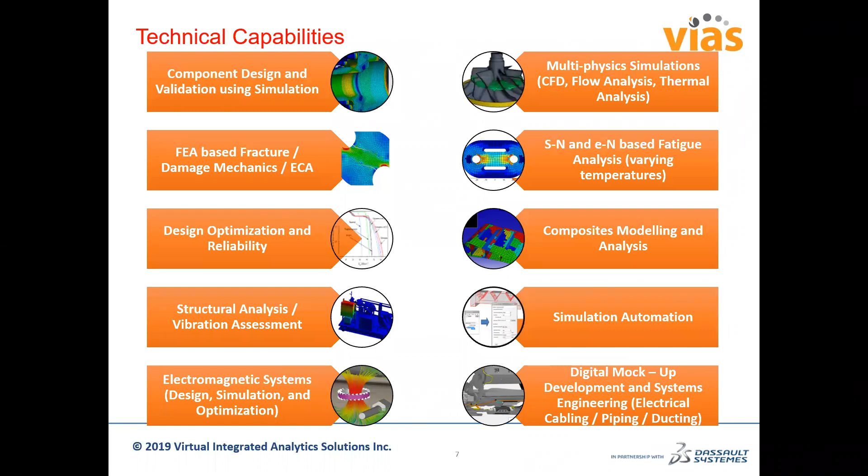That's pretty much our value proposition. I'll probably skip this section, but we are there to help you. We have a very good technical team with technical excellence and innovation, multiple domain experience so we can think outside the box, and a very dedicated team with a customer-first focus. So if you have any need, we should be able to help you out.

We also provide a lot of training. We have a training room here in Houston, and we also provide on-site training at many other locations, though we generally need a quorum of 2 to 3 students. We can come to your place if you want to train your group. So we provide both customized training out of the toolbox as well as industry-focused trainings.

With that, I will hand the slides back to Shri, and he will go over the Abaqus 2019 update. As I mentioned, if you have any questions about the update, or any general queries regarding your simulation or PLM needs, let us know. We'll have our experts give you an answer as much as possible. Thank you. Shri, do you want to take over?

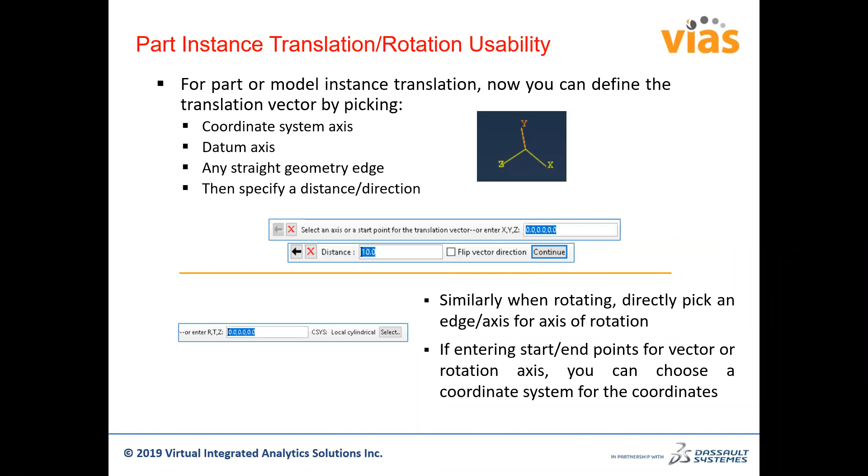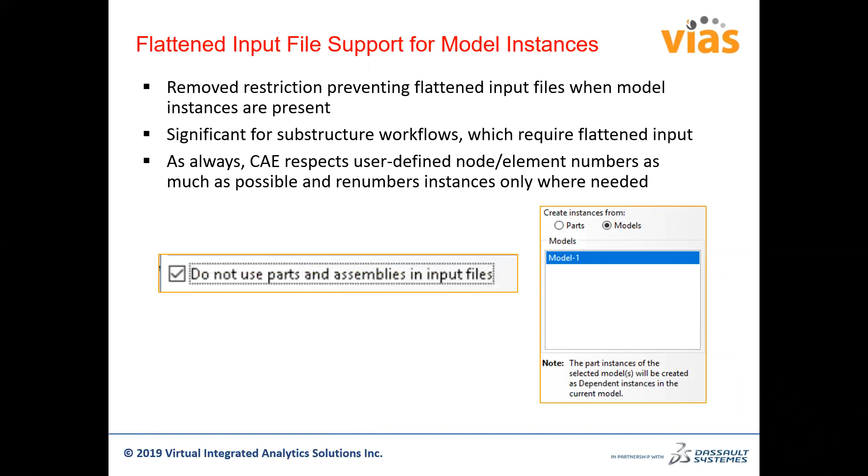We also started giving support to the CAXA and SAXA elements in GUI. That's basically axis-symmetric elements, but with asymmetric deformation. It supports both first and second order continuum and shell elements. You can specify 1 to 4 Fourier modes, and extra nodes are generated in the input file only. You don't see it in the CAE part.

Non-default node number offset can also be specified if you want that. Nodes due to Fourier modes do not exist in CAE, so you basically don't see them, and they cannot be picked up. But in the input file, they're created when it's written.

Abaqus doesn't support element-based surfaces on CAXA or SAXA elements. So even if you define it in CAE, they will just not be written in the input file. Pressure loads will automatically be applied using DLOAD instead of DSLOAD. Usually for a pressure load, DSLOAD is automatically created, but in this case they use DLOAD, which is an element-based load description.

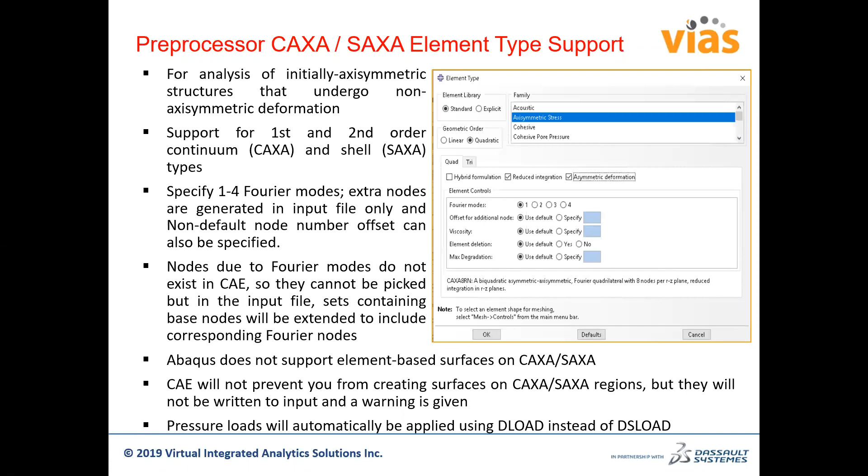This one is about fluid inflator interactions and properties. It's mostly used in airbag systems and so on. If you have a fluid inflator, you need to define it, which was not earlier available in the GUI part and earlier releases. Now it's been activated in Abaqus 2019 release.

The way to define that would be to create an interaction. So you go to the interaction module, just like any other thing like a contact or tie, and you create an interaction there, and you have an option to choose fluid inflator property now. Once you associate the fluid inflator with a fluid cavity interaction, it'll actually open up a set of dialog boxes in sequential way as you keep progressing.

So you have to create the interaction property fluid inflator, and then it'll ask you to fill in those dialog boxes that you see on the right bottom, edit interaction property, and once you are done with that, you basically define the fluid inflator in GUI.

So fluid inflator property defines basically mass flow rate, temperature, inflation time data, and mixture of gases entering the fluid cavity. Within the cavity, you can have a mixture of different entities. Those can be defined with different interaction properties, as seen in the bottom right dialog box.

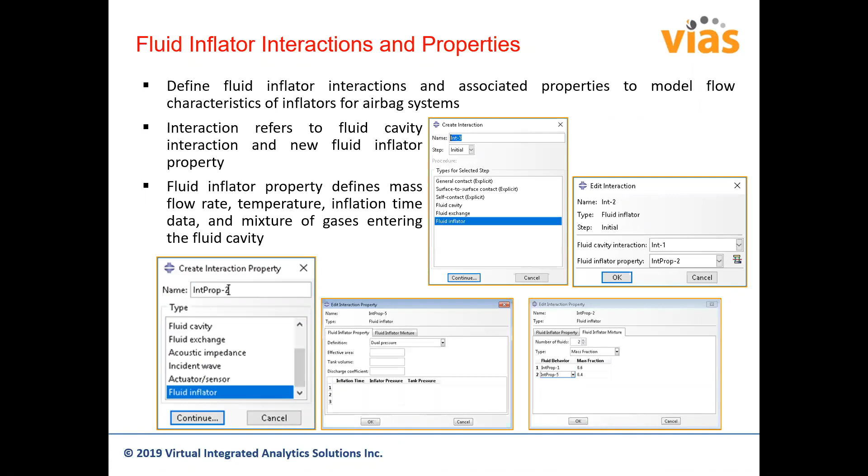There's some optimization enhancements. This is related to Abaqus and Tosca coupling in a way. Support for overhang restriction for topology optimization. So just in case if you have some kind of structure, if you can see my mouse, in the middle here there are red color support structures. These are required because of the additive manufacturing constraints, specifically because of the model geometry, so we have to have the supports also included in the modeling.

But with the new enhancement where you can define an overhanging constraint, the necessity to define support structures is removed. For example, in the dialog box, by geometric restriction, you can define an overhang angle. That's basically defined by the red line here with an angle alpha. Based on that, you can actually remove the support structures and have a model free of support structures. That will save some time.

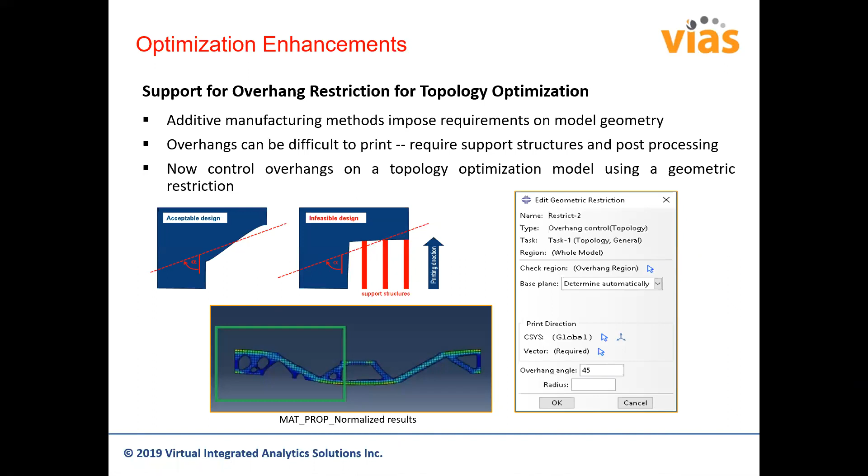There's also sensitivity-based shape optimization. Shape optimization didn't have the sensitivity or studies option with Abaqus and Tosca, but now that has been included. In the dialog box here, you can see that earlier it used to be only condition-based optimization, but now we have an extra option of using a general optimization sensitivity-based algorithm too for shape.

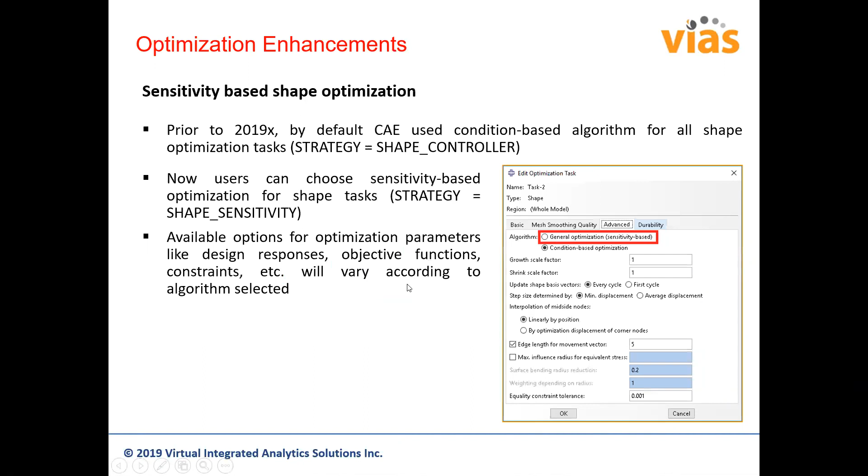It was available for other optimization aspects like topology, beam sizing, and all that, but I think for shape this is the first time they've introduced it, in 2019. So the available options for optimization parameters include the regular ones - design responses, objective functions, constraints - and they'll vary according to the algorithm you select, either condition-based or general optimization.

You also have this option, the way to define that would be to use Abaqus sensitivities when possible. This particular one will be available in the dialog box. What it does internally is activate the sense calc mode, which is like a parameter for Tosca, into automatic. Otherwise, it will go back to the original one, which is sensitivities with sequential run mode in Tosca. This is available for all task types: topology, shape, bead, and sizing.

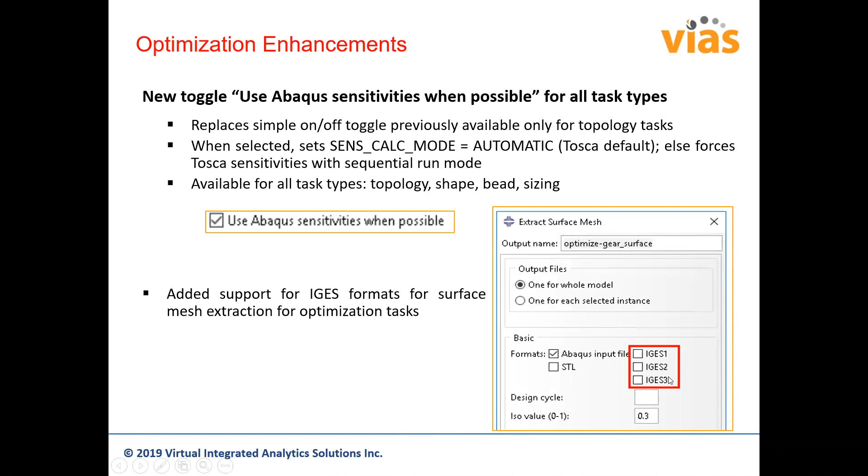The new enhancement allows you to use IGES surface formats for surfaces. In the optimization task, the earlier options were only Abaqus input file or STL. Now the new format added is IGES format.

The element output with position average at nodes, when you use this keyword in the input file, writes output with average at nodes. But that was not available to be visualized in the ODB when opened in CAE—it was more like an output written to the DAT file. Now they've included that as a field output, so you can see it in CAE itself. All operations related to a nodal field are supported, like contour, symbol plots, probe, etc.

There are a bunch of operations that can be done for that particular output. I'll skip the details since we have other topics to cover, but basically most of the regular operations you do with contour plot or field output, you can do the same with this one too.

Invariant computations for complex frequency results: if you have complex frequency in your model or solution, three complex envelope options have been added—min, max, and max absolute. They work by combining the real and imaginary portions of the result while varying the angle from 0 to 360 degrees. These envelope methods are a great alternative for visualizing the complex form of stress invariants, and that's very useful.

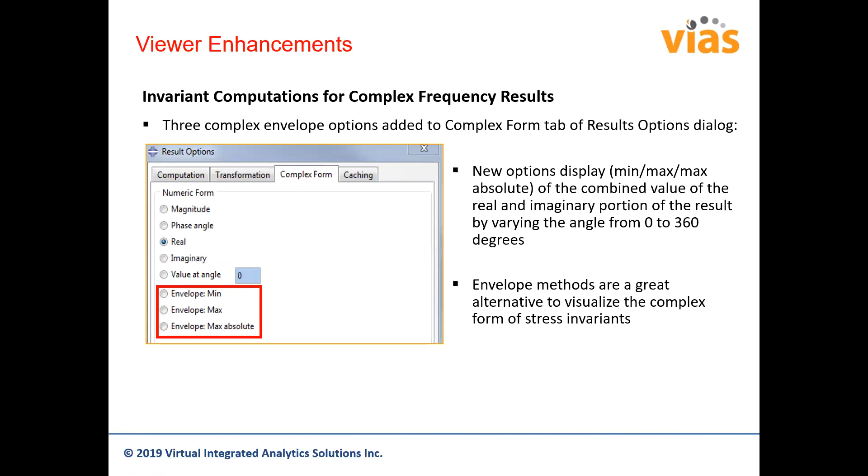There's a new variable called BRADIUS available for output. When you request it, I don't think it's available as a model output request through the GUI—you have to go through the input file or keyword. Once you request that output called BRADIUS, you can check it as a contour plot, showing the radius of the beam across the model. This helps you see the spatial distribution of beam radius overall, which is very useful for lattice beam optimization techniques where you want to see what kind of beam radii are given throughout the model.

The way to activate beam radius visualization in the CAE visualization module is through this particular dialog box—render beam profiles—which you access through one of the menu options.

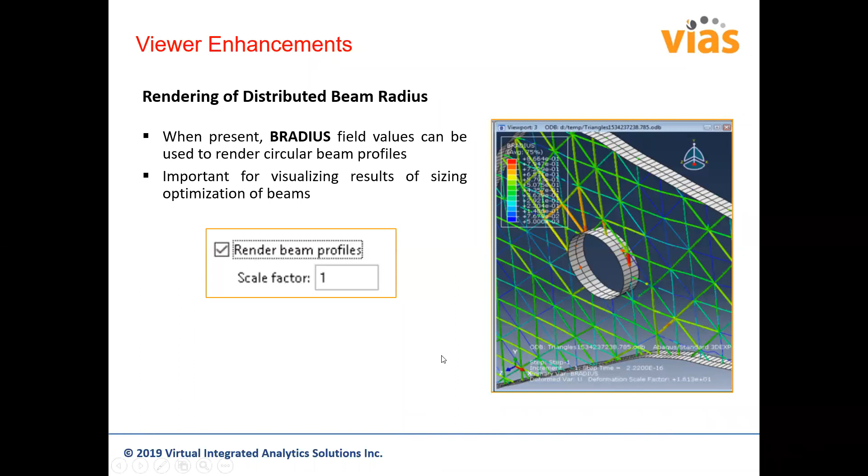There are other enhancements I'll briefly go over without going into details. We can now export CAE assemblies to spatial ASAT format, which is useful for 3D experience. We can also capture all parts and assembly positioning, and it supports model instances besides part instances. There's also support for selecting multiple frames at once in field output reports.

This is a new one—you can have multiple frames written together into field output reports as a text format. You can also select active steps of frames to include in the report, so if you want only specific frames active in the visualization module at that point in time, you can write just those active steps into the report. It also works with annotated or CSV formats, which can be used in Excel sheets for further processing.

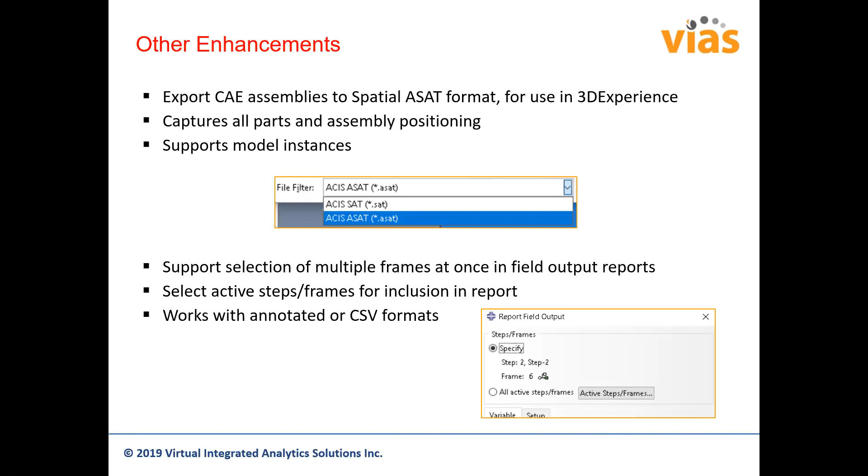There's also a reverse contour plot legend that has minimum on top and maximum on the bottom, which is useful for some processes you might want.

There are also scripting API enhancements: you can retrieve a cross-sectional area defined by a free body cut, get exterior element faces of a solid element sequence—so if you have a sequence of elements, you can extract only the exterior faces facing the outside region—and also get exterior element edges of shell or 2D element sequences.

With that, the GUI updates are over, and let's move on to the nonlinear mechanics updates—this is more related to the solver part in a way.

Additive manufacturing updates: this is a new enhancement for additive manufacturing—outputting the displacement or rotation at a node from the time it becomes active. We also provide better agreement with experimental results in cases when inactive elements follow the movement of active elements because of this enhancement. Both history and field output are supported in this case.

For example, here in the picture, they show displacements in a plate, comparing follow deformation equal to no versus follow deformation equal to yes. You can see a significant change in results.

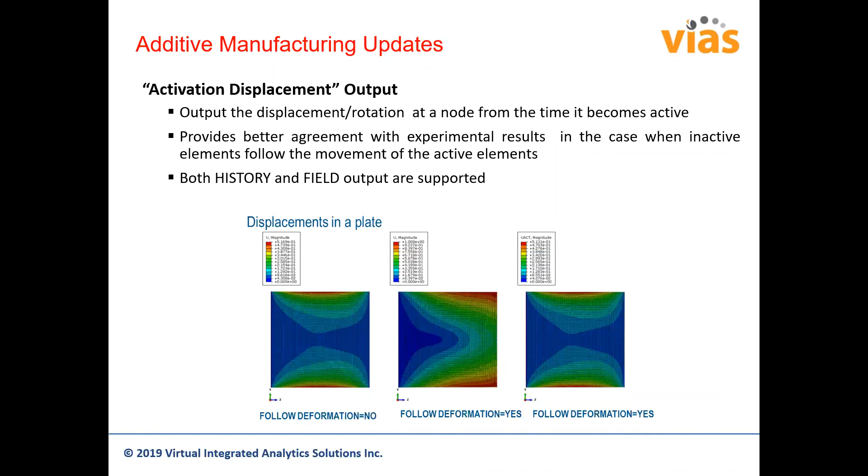The next one is a convergence improvement of heat transfer analysis. Some of the heat transfer analyses run pretty slow. It's better to have it for performance's sake and also in the convergence aspect too. So those have been enhanced in this particular release, both for transient and steady state when linear elements and temperature-dependent conductivity are used.

Improvement was achieved by consistent evaluation of conductivity at the integration point. In some cases, heat transfer analyses that previously failed to converge now complete successfully. So that's a big improvement.

There's also an improvement implemented specifically for the brick elements, the hexahedral elements. The previous behavior can be restored if you want by using the keyword *SECTION CONTROLS, HT INTEGRATION=OLD, just in case you want old results to be used for your current analysis.

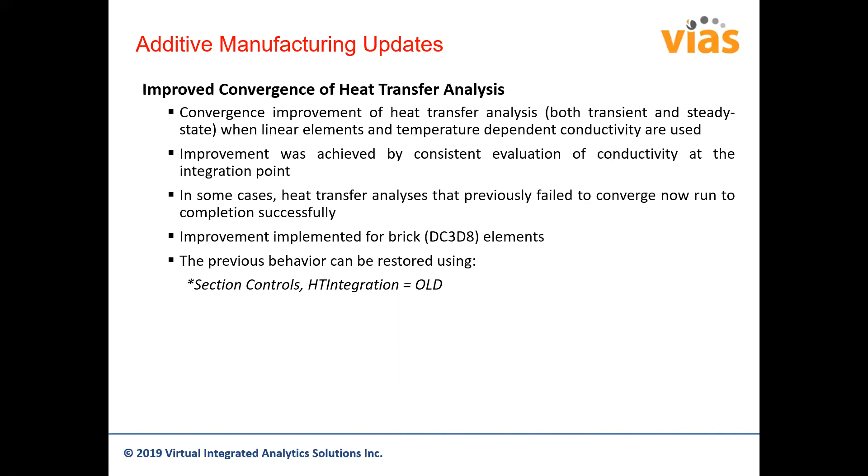The size of the event series data is no longer limited to 2 GB. We can now go beyond that. You can now define event series with over 420 million events. The enhancement is available only for event series defined in the sim file, which is basically a file parameter on *EVENT SERIES, so you have to use that to activate the sim file. It's available for pure heat transfer analysis in Abaqus/Standard, both field and history output.

Then there are a bunch of field output variables introduced in the Abaqus 2019 update. There's EHUMDFLUX, which is element internal heat energy due to non-uniform moving flux. There's also element internal heat energy density due to non-uniform moving flux, and then whole model heat transfer energy due to non-uniform moving flux. So with respect to heat transfer, there's the element internal heat energy and density, and whole model heat transfer energy.

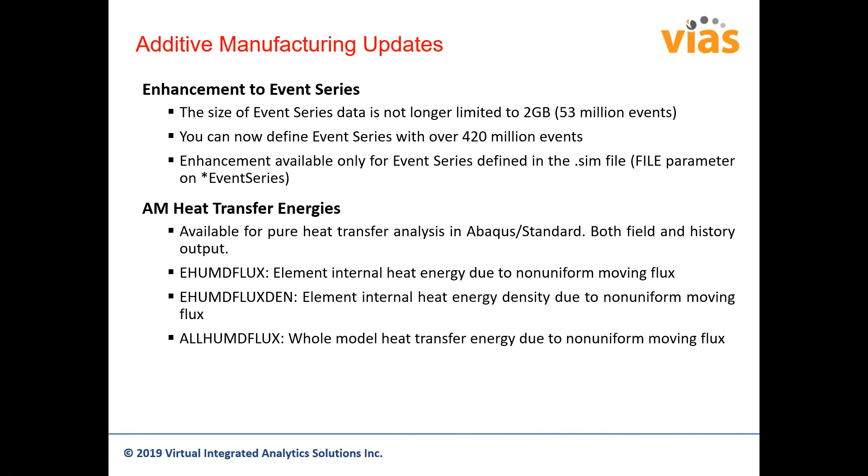Moving on to the next one, which is fracture mechanics. There's linear elastic fatigue crack growth under mixed mode conditions. There's one update on that which improves the performance of both the general and simplified approaches. It allows for change of contact conditions within a loading cycle, it accounts for large geometric nonlinearity, and it accounts for mixed mode fatigue loading. So these are the enhancements with regard to linear elastic fatigue crack growth under mixed mode conditions.

The next one is for XFEM for 3D non-planar cracks, smoothing the predicted crack direction along the crack front. It includes the contributions from the normal of not only the elements ahead of the crack, but also the elements directly behind the crack front. That was not available earlier, and it has been introduced in the new release.

Improved performance and convergence with multiple node release. By default, only one row of nodes is allowed to fracture ahead of the crack front within one increment. But now they have relaxed that, and multiple nodes can undergo fracture without really affecting the performance.

Symmetric cohesive elements, there's an update on that too. The symmetric plane can be chosen as any plane perpendicular to one of the global coordinate axes. Symmetric deformation of cohesive elements will be automatically enforced, and the user doesn't need to apply any symmetric constraints or boundary conditions. So there's less work required from the user.

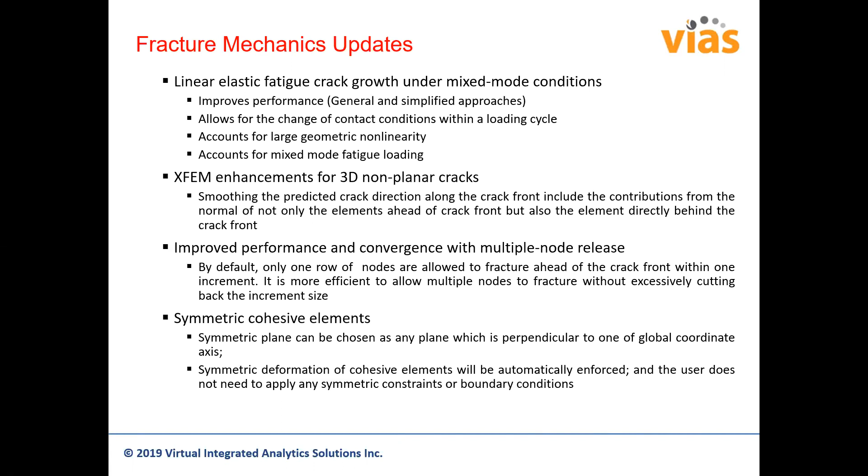With regard to elements, two sets of elements have been introduced in Abaqus 2019. One set is poroelastic acoustic Biot elements. These are coupled for structural and acoustic analysis. The nomenclature is C3D8A, where structural is C3D8 and A stands for acoustic. You have multiple shapes like brick, wedge, and tetrahedron. The same shape functions are used for both the displacements and pressures, which are the variables that will be solved for.

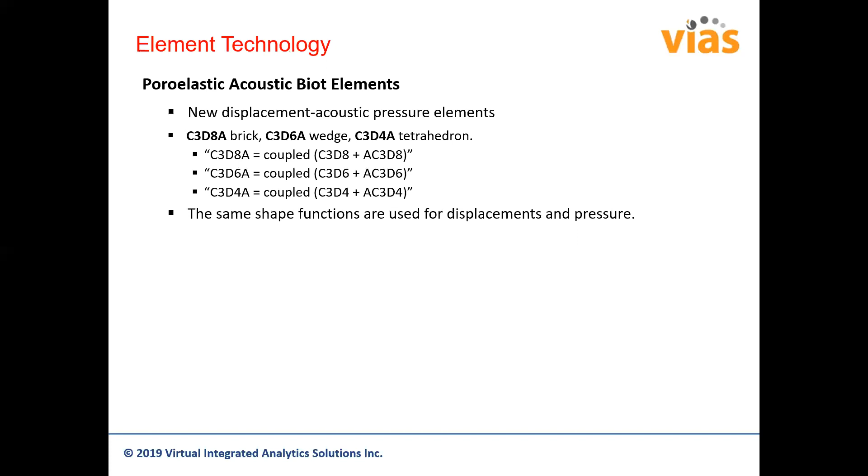The other set is the new shear panel element, SHEAR4, for Abaqus/Standard. These are mostly used in aircraft wing and fuselage structures, and will be very useful there. They are intended to model the response of a buckled plate. Shear panel elements carry only shear forces applied to their edges. They are 4-noded elements with 3 displacement degrees of freedom at each node, and only elastic material can be applied for these elements.

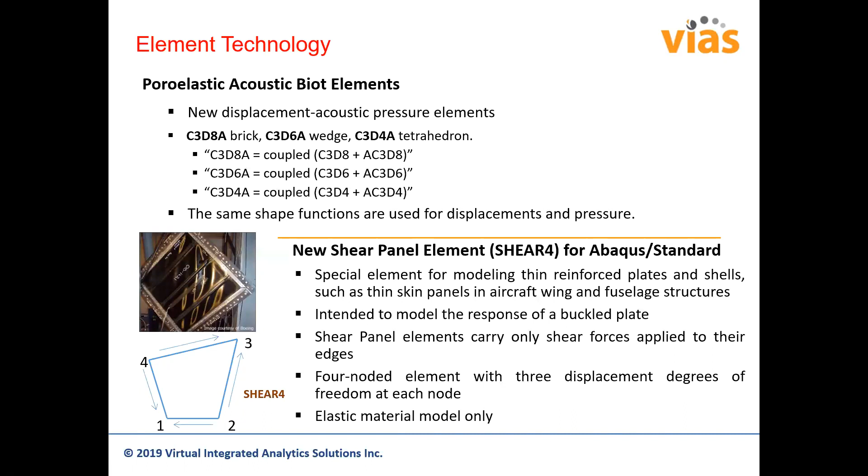So as I mentioned earlier, the BRADIUS was the output variable. You can actually now define that for the beam elements. It's supported in Abaqus CAE for the contour plot output display, but it cannot be used for definition or request of the output itself. For that, you need to use the input file: in star element output, you add BRADIUS in the data lines itself. And to display the output, you have to again render the beam profiles in the visualization module of Abaqus CAE once you open the ODB with the beam elements in the model.

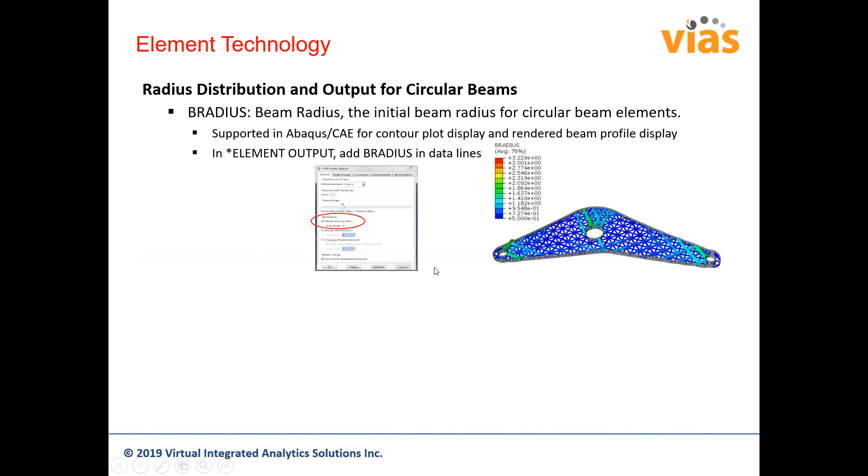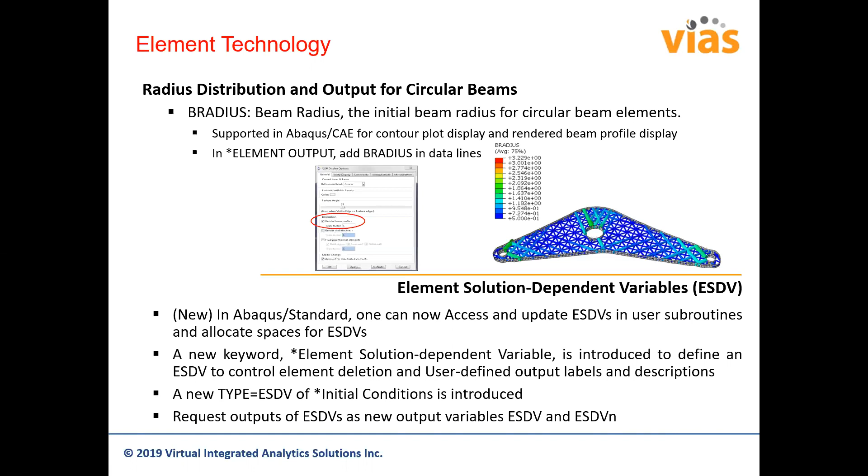There's also element solution dependent variables output that's given as an output variable, ESDV. In Abaqus Standard, one can now access and update ESDVs in user subroutines and allocate spaces for that. These are specifically used in additive manufacturing when you want to group a bunch of elements together based on specific values of these variables. It's used to define ESDV to control element deletion and also user-defined output labels and descriptions. A new type equal to ESDV of star initial conditions is introduced. It requests outputs of ESDVs as new output variables, ESDV and ESDVn, where n stands for the number of variables.

Low density foam, this is a specific material enhancement now. The model is already available in Abaqus Explicit, but I think it's been introduced in Standard now. The model is intended for highly compressible elastomeric foams. Import is fully supported, but there are some limitations. It's only applicable for quasi-static response. For quasi-static response, the strain rate dependence is ignored, and tension cutoff and failure are not supported. They're ignored if included in the definition.

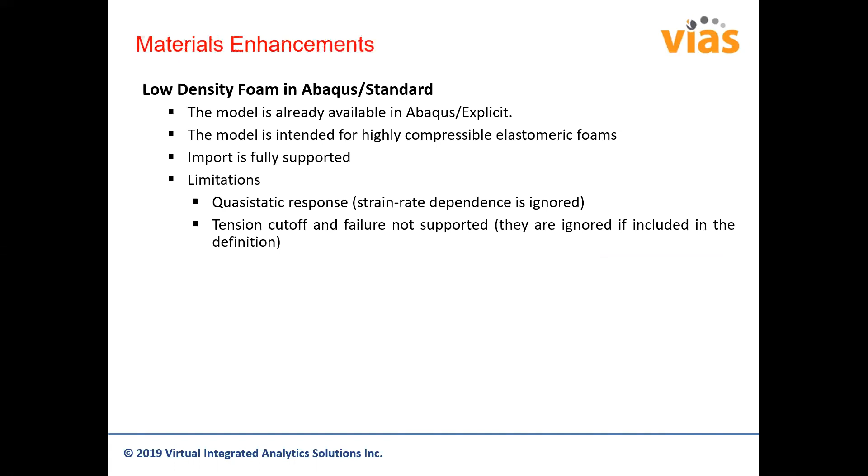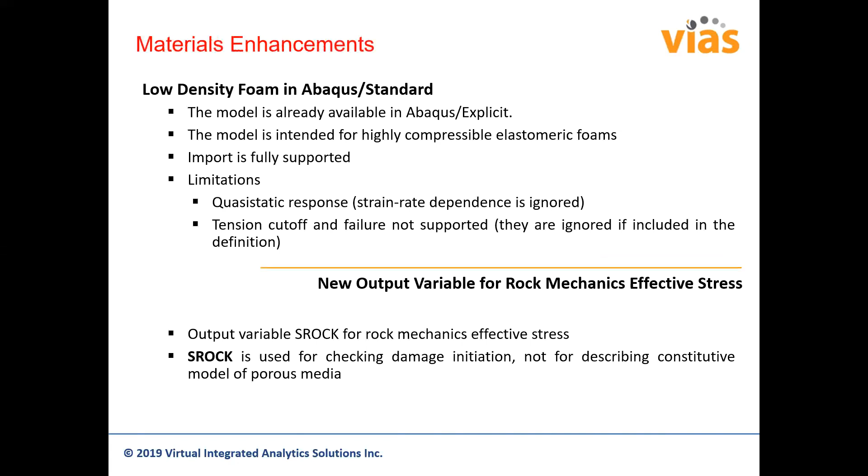There's also a new output variable, SROCK, for rock mechanics effective stress. SROCK is used for checking damage initiation, not for describing the constitutive model of porous media. So it's only for damage initiation, and it's an output variable.

Enhancements to superelastic materials: a modified formulation for superelastic material is introduced. This is basically like inbuilt materials in Abaqus, like nitinol, for example, which is used in stent analysis. They have actually improved the import functionality between Abaqus solvers, and also improved the convergence and performance of the material model itself.

A new keyword has been added in Abaqus. This is more of a section definition, star transverse shear. It allows users to define material transverse shear moduli for computing transverse shear stiffness of shells and beams. It eliminates the need, which was the earlier one, to define transverse shear stiffness as part of the section definition. But now we can have that as a material definition. It is convenient for users to compute transverse shear stiffness when a shell section has spatially varying thickness or a shell section is made of composites. Now it's defined as a sub-option of star material transverse shear, with type equal to isotropic, orthotropic, anisotropic, and dependencies are based on the field.

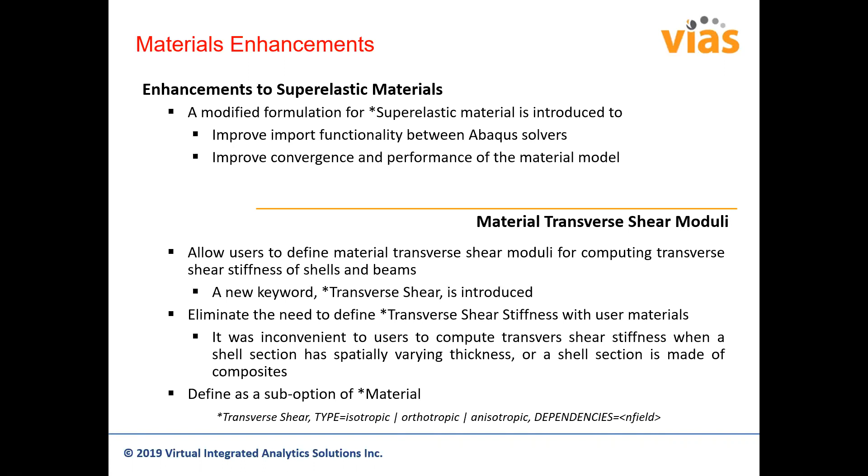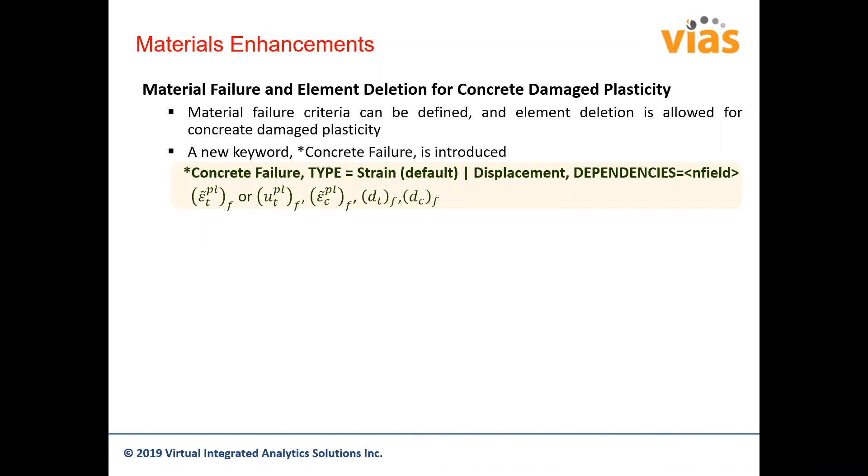There's also material failure and element deletion available for concrete damaged plasticity. Material failure criteria can be defined, and element deletion is allowed for concrete damaged plasticity. Pardon me for the typo there, it's concrete. A new keyword, star concrete failure, is introduced. Concrete failure type equal to strain, default, or displacement. Again, dependencies on any field variable. You can define the strain or the displacement, tensile or compressive, and also the damage variable. Again, based on field dependence if you have that.

Output enhancements for traction separation response. In Abaqus Explicit, two new output variables are introduced. Basically, NEEQ, which is equivalent nominal strain, which is again given as a formula there. It's a function of normal strain and shear and tangential. Effective separation, basically the separation between the two surfaces which are joined by these cohesive elements, is defined by that formula, which is the effective strain times T naught, the distance between the two surfaces, which is given by the cohesive element thickness.

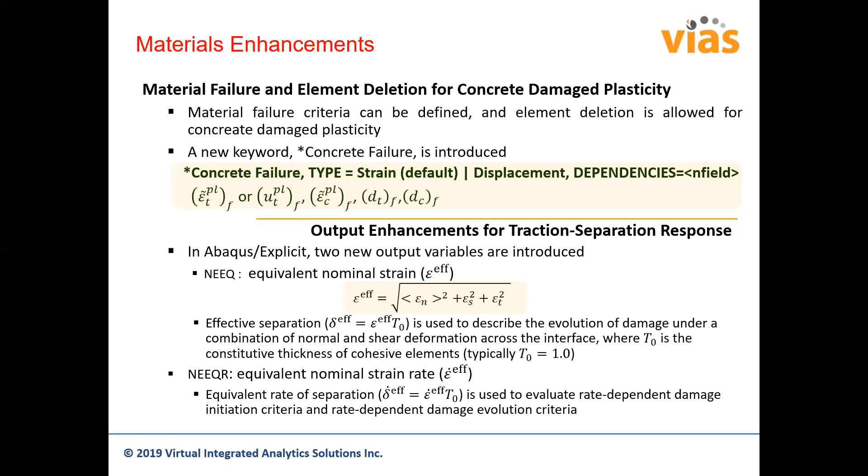The NEEQR is equivalent nominal strain rate. It's epsilon dot E effective. Basically, this is a strain rate. It's just the same way as epsilon effective, but with dependence on time.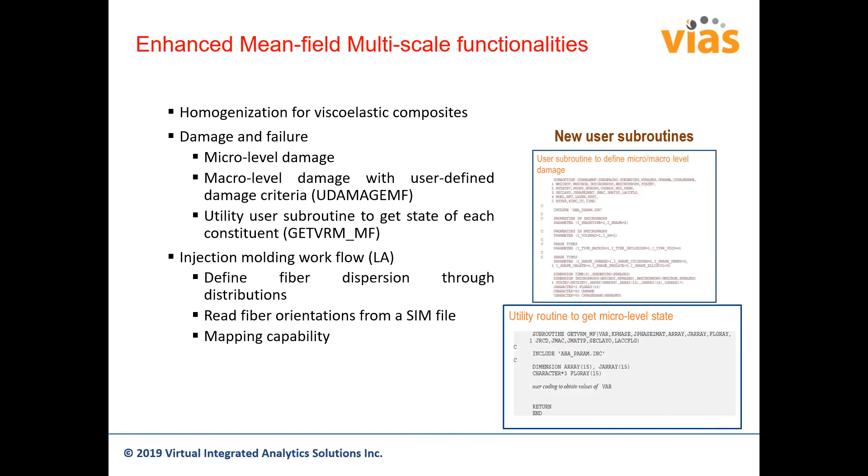Moving on to the next topic, it's about contact. By and large, contact has been seeing improvements over a period of the last few years, especially by introduction of general contact in Abaqus Standard. So it has been seeing various formulations and even the different dimensions like axisymmetric 2D models, 3D models, and so on. So this is one more step towards that.

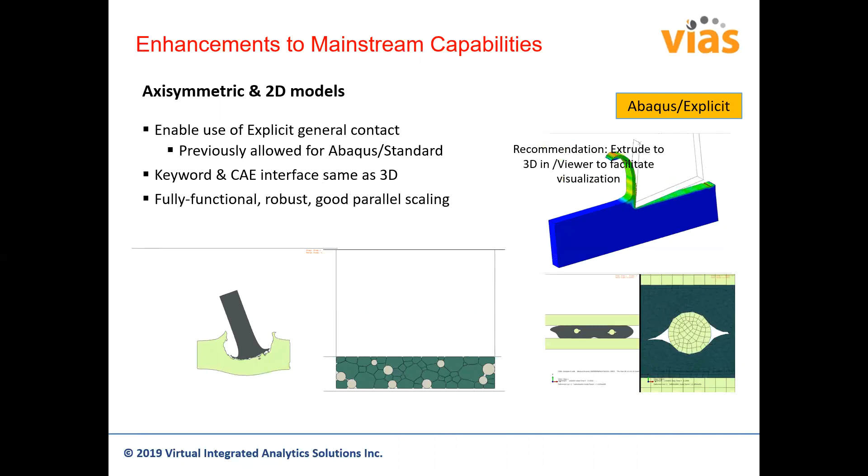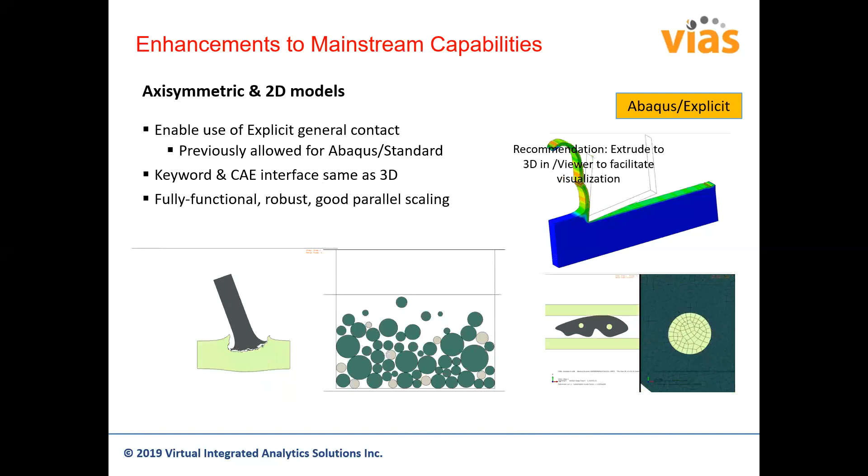So basically enable use of explicit general contact. Now this is for Explicit, previously allowed for Abaqus Standard. So axisymmetric and 2D models, you could use the general contact for them in Standard, but now Explicit also has introduced that. Keyword and CAE interface same as 3D, fully functional, robust, and there's a good parallel scaling also. Some of the examples are being shown here in animation. I will skip the details part of it.

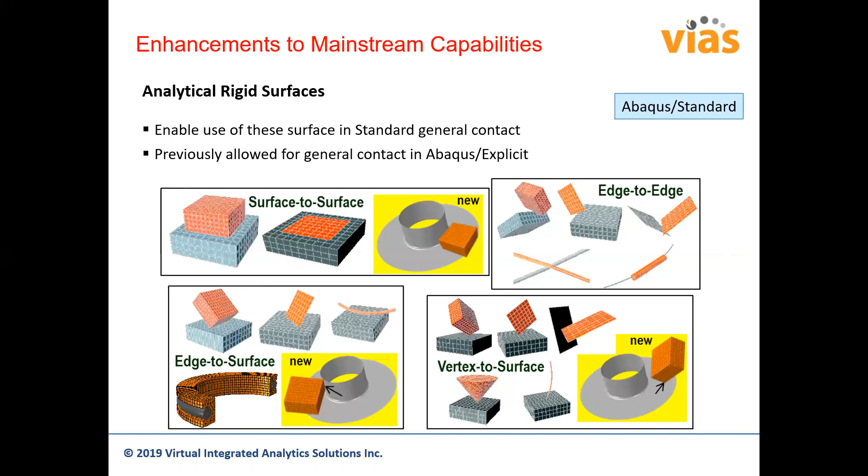This is in regard to Abaqus Standard. It had a limitation that you couldn't use analytical rigid surfaces for general contact. Now that has been relaxed, but that was available in Explicit, by the way. So again, as I was saying earlier, these enhancements have been introduced in Standard over a period of the last few years. They started with surface to surface, then they had edge to edge added, edge to surface, vertex to surface, and so on. And some of them had new features added because of this, and because of the analytical rigid surface. That's a big enhancement because I think that was one of the limitations for general contact in Abaqus Standard that's been addressed in this release.

Again, this is an example where they're trying to show that you can actually see the output of what are the surfaces that are getting into the general contact definition. Once you open the ODB in the Visualization module of Abaqus CAE, all you have to do is go to the create display group and check the internal sets for the surfaces, and it'll highlight what are the general contact surfaces or faces that are coming in contact.

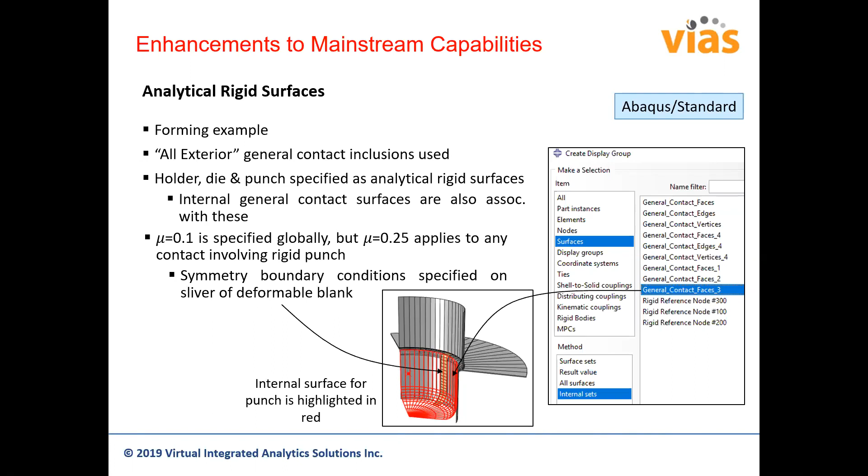So they are also saying that if you have symmetry boundary conditions specified on the sliver of a deformable blank, that's being shown here. Internal surface for punch is highlighted in red. So all those details of a general contact, what are the master and slave in a way, you can see that in the create display group from internal sets of the surfaces.

Now moving on to the next one, a threaded interface approximation, especially for bolt interaction with the other components in the system. Cylindrical mesh threads are defeatured. There's a small sliding contact, normal adjusted with consideration of reference thread geometry. And then it uniformly corresponds to the same thread face, top or bottom.

This is a pre-existing capability, but there were some issues with that, and they fixed it as a bug. So the contact normal wasn't defined properly in some cases. They actually addressed that, and they can also now define a consistent positive thread angle in the GUI itself. There are new options that have been added. The small sliding contact normal is locally associated with the top or bottom thread face, which is more realistic. And you could actually have both threaded sides, like right or left-handed threads, now in the new enhancement.

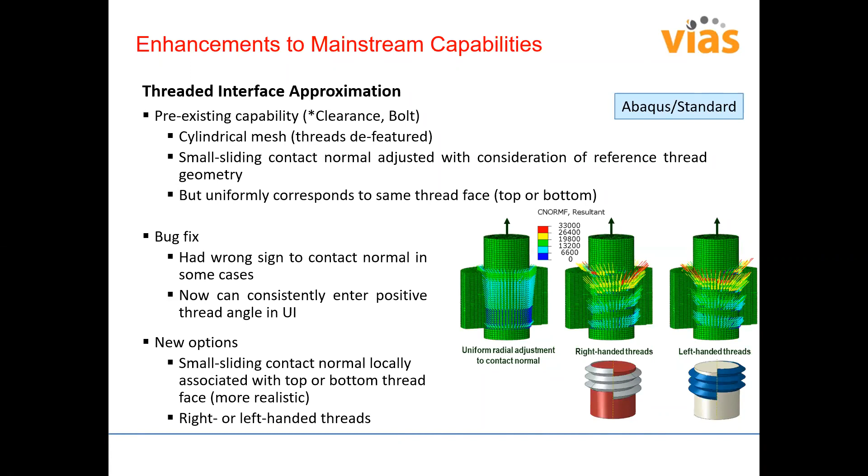The next one is thermal and electrical coupling. You can use general contact with the following procedures: pure heat transfer, and coupled thermal electrical. Earlier that was not available for these two particular procedures. This allows the consistent use of general contact across sequential thermal stress analysis.

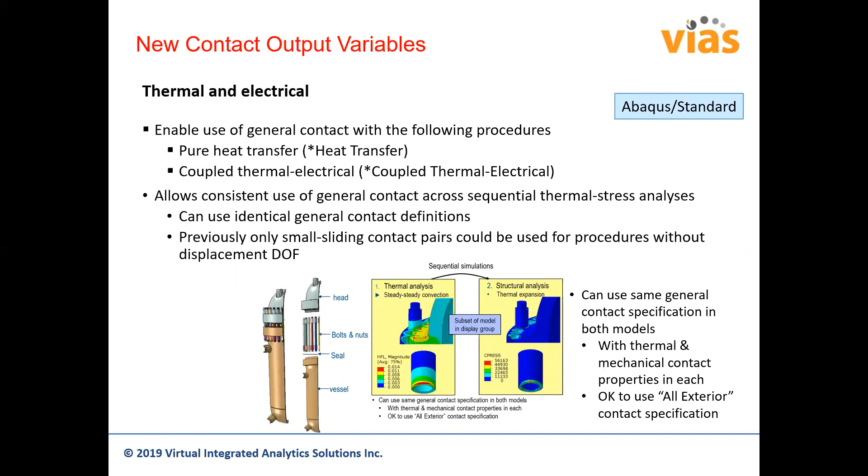So for example, now because you can use the general contact in both the thermal and structural analysis, it's somewhat seamless. Otherwise earlier you had to use the contact pair definition for the thermal procedures and then use regular general contact for stress analysis. So instead of having two different definitions, now you can have the same general contact definition for both analyses. So that's an enhancement in Abaqus Standard for this release.

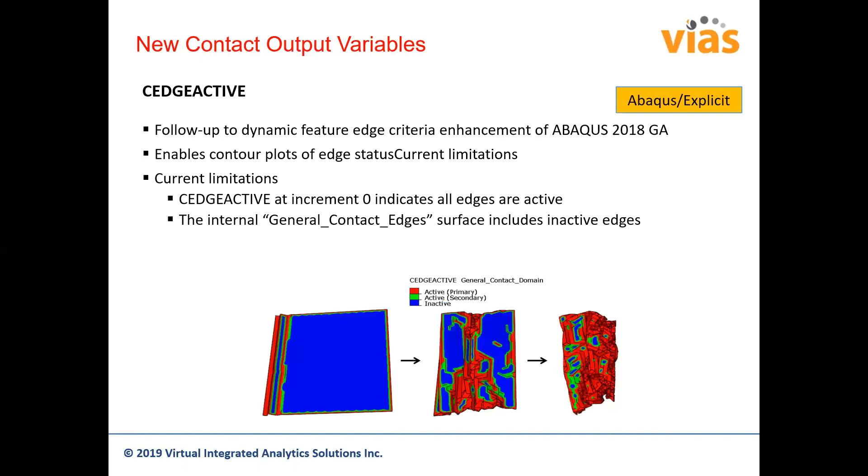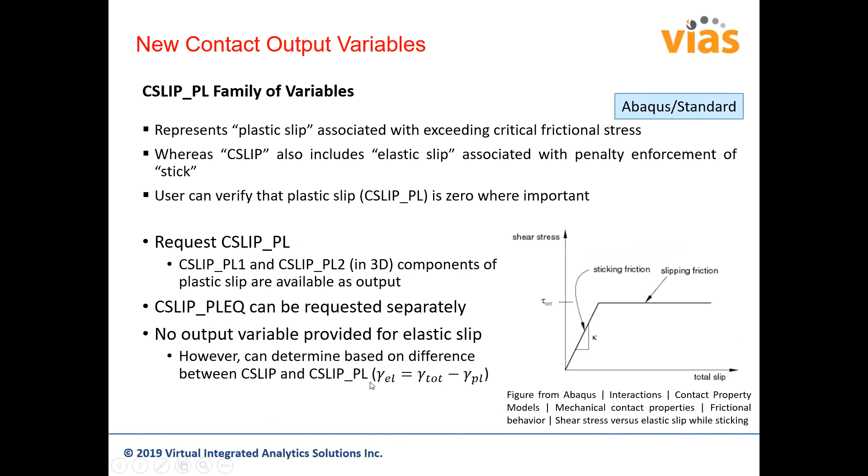So we can have the output of that as a variable called CSLIP_PL. There are 1 and 2 directions for a 3D surface. There's also an equivalent plastic contact slip that's been introduced. There's no output variable specifically for elastic slip, but once you have the total slip, CSLIP, and the new plastic contact slip variable, you can get it as a difference.

There's also a new variable CICPS. This is a scalar output variable giving the integral of contact pressure over the entire surface. The difference between this one and CFN, the existing contact normal force output for the surface, is that in CFN you take care of the normal direction.

So when you have a cylindrical surface acted upon by uniform external pressure P, your CFN will almost come to 0 because of symmetry, whereas CICPS disregards the normal definition and just gives you a total force. This was requested by some users, so it's been implemented in this release.

For example, consider an interference fit between concentric rings. You have uniform contact pressure, but the CFN output would be 0 because of the symmetry, whereas CICPS would show a non-zero value.

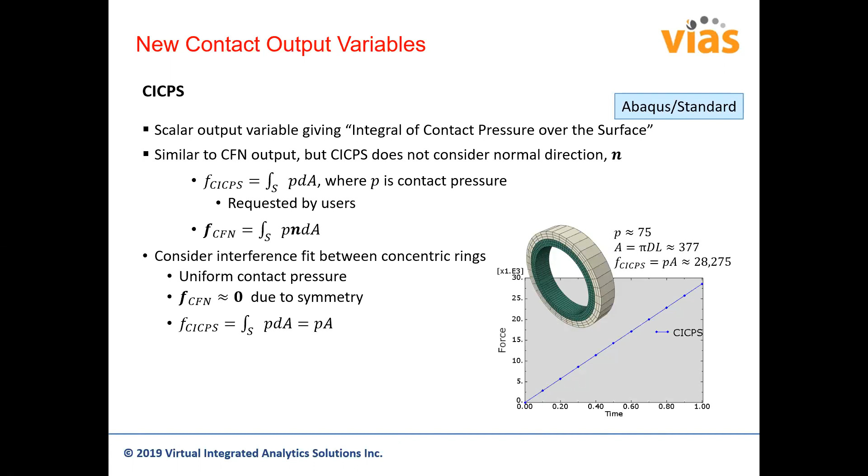There's also a moment due to shell offset and the normal force acting on it. In the previous behavior, the contact normal force acts through the nodal location with no consideration of shell offset. Now that has been enhanced so you can introduce the effect of the shell offset and the moment because of that.

The previous behavior led to non-physical bending for cases with shell offset, but that has been removed with the new enhancement. It can be accessed via contact controls assignment, rotational terms equal to structural.

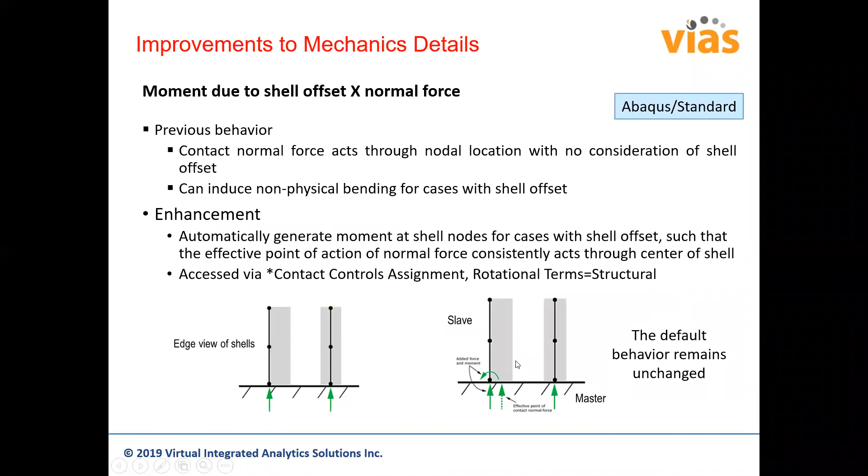This is the picture, an edge view of the shells. For example, you have this with the shell offset on the slave, and the results may not be meaningful in this kind of scenario previously, but now it works better.

There's also another enhancement about shell thickness itself. This has nothing to do with offset, it's just the thickness of the shell with the tangential force. The earlier behavior used to lead to misleading results. Previously, we generated force couples on the slave nodes to cancel the moment associated with the tangential force times the net surface thickness.

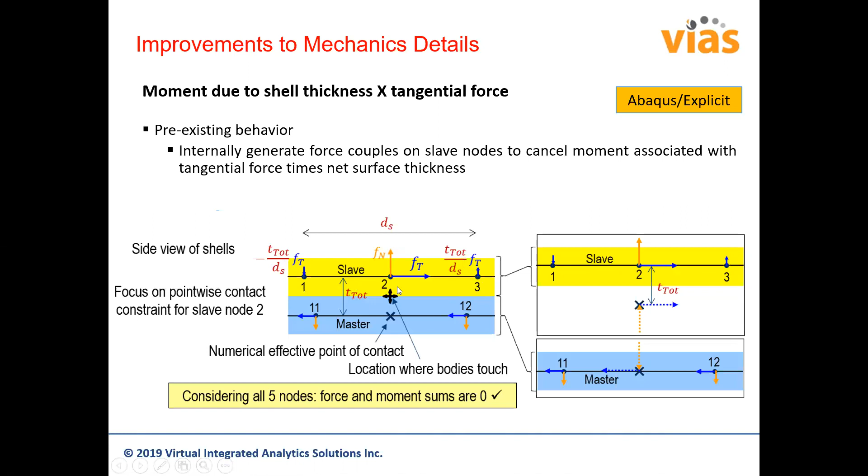So if you have the tangential force acting at the interface between these two shell elements, the moment arm is half of the thickness of the slave, and that was introduced as a force couple. You can see ft times one fraction, the negative one, and ft times another fraction, the positive one. That's the force couple introduced by transferring the tangential force to the center of the slave. This was the previous behavior.

With the new behavior, they independently take care of the slave and the master separately instead of using only the shell thickness. This leads to better accuracy. They transfer both of them independently. You can see that now the force couples come out for the master element too, differently from what has been given for the slave.

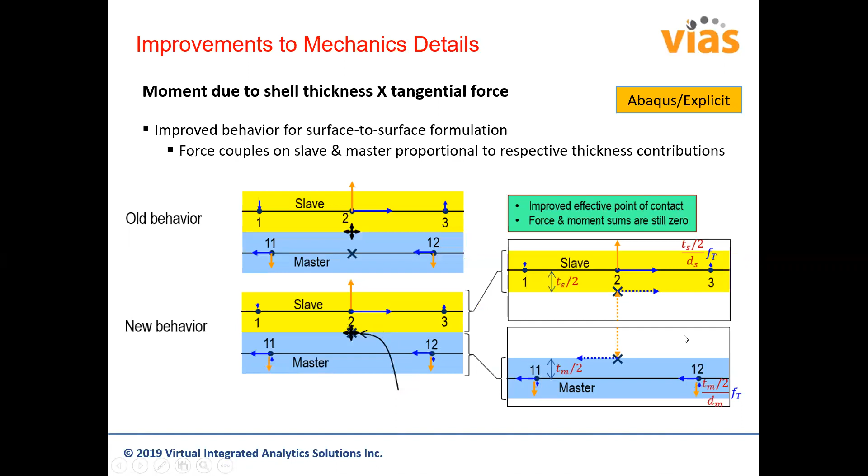Cohesive contact: this is a multifaceted effort across releases to improve robustness and accuracy in cohesive contact, and also increase consistency with cohesive element behavior. Initial focus areas for Abaqus Standard include reducing sensitivity to master and slave roles, so if you interchange them, they shouldn't play a significant role. Also offsetting the point of contact from reference surfaces based on respective thickness contributions, and defining the cohesive normal direction based on the average of adjacent surface normal directions.

There's also improved treatment of stiff permanent cohesive bonds, making this an attractive alternative to surface-based tie constraints, which would help with performance.

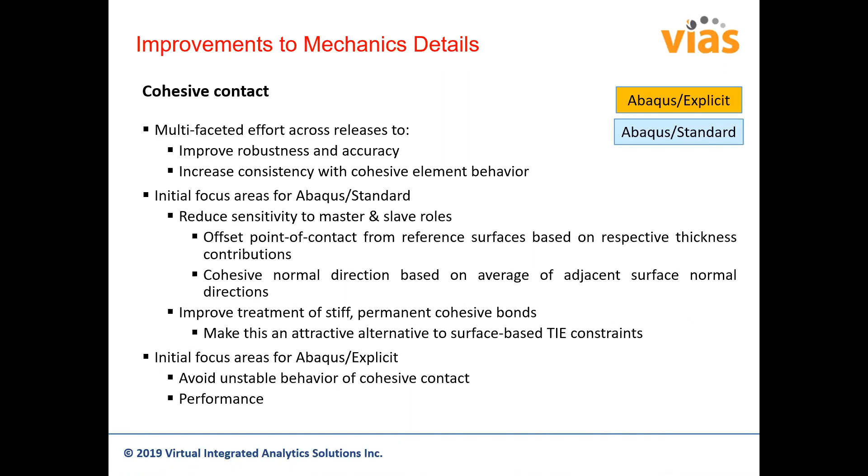Initial focus areas for Abaqus Explicit include avoiding unstable behavior of cohesive contact and improving performance. I have previously seen very large models with cohesive contact definitions in Explicit take a lot of time, so I hope performance has definitely improved with this particular feature.

The current release will give an error if these contact control features are requested. But if you want to revert to only a warning state, you can do that by setting start diagnostics, old contact controls equal to warning, which will turn the error into a warning.

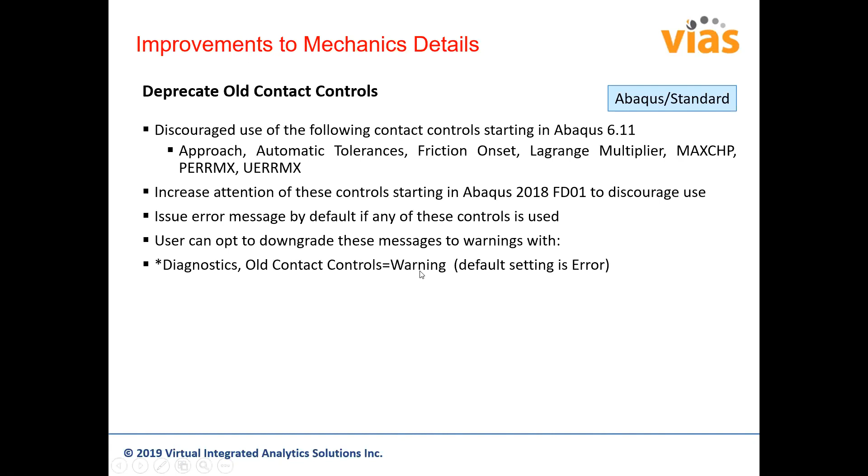Initial contact stress: suppose you have two bodies coming into contact that already have initial stress defined for them. Up to Abaqus 2019, the initial contact stress was seen as 0, which used to lead to misleading results. Now with this enhancement, you can define an initial contact stress between the two bodies even when they have some initial stress defined between them, which is useful for geomechanics and other workflows.

I guess this slide doesn't have details on how to define them, but I think you can define them by setting the initial conditions for the contact stress.

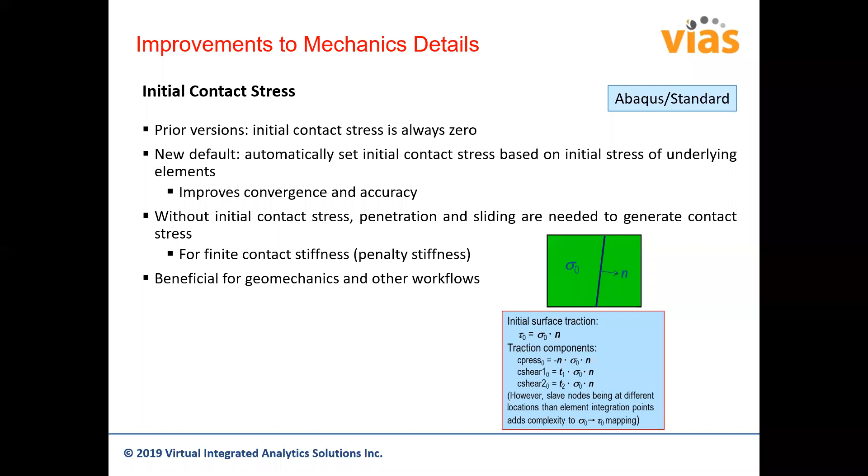This is an example where, in the initial state, you confine the two bodies and define some initial stress, showing the stress at t equal to 0. Once you look at the final state, previous releases used to give misleading results for the stress, with a loss of 11%. But in the current release with the enhancement, the stresses are properly preserved because the initial contact stress between the two bodies has been correctly defined.

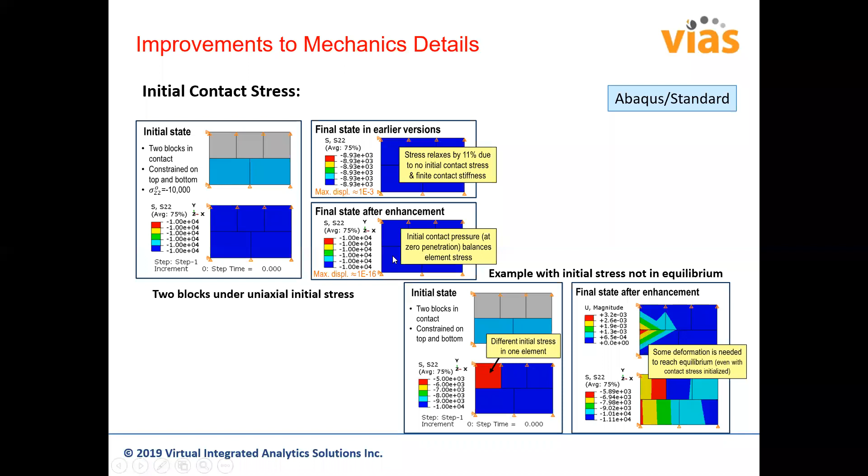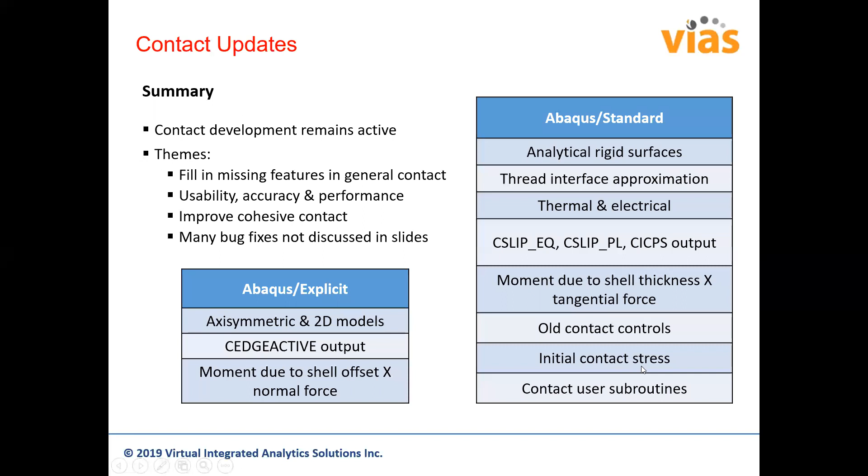To summarize, contact development remains a very active process. They want to fill in missing features in general contact, and generally improve usability, accuracy, and performance. They've also improved cohesive contact with many bug fixes, added output variables, and updates to shell thickness and shell offset with respect to contact forces between shell elements. Old contact controls have been deprecated, and initial contact stress has been introduced in this release.

Next, moving on to a new topic: Abaqus multi-grid iterative solver updates.

By and large, people generally use the direct solver as opposed to the iterative solver, but it's very helpful for large scale simulations to have the iterative solver working well. All major customers demand solving larger and larger problems. Someone solving with say 1 million degrees of freedom in 2005 may currently be running with 200 million degrees of freedom just because the computational resources are available. The performance also has to catch up from the Abaqus solver side, and that's basically what the effort has been about.

For high fidelity and accuracy, you may want the same model, which may be of a small size, but with a very refined mesh just for the sake of accuracy and high fidelity. Or otherwise, you could have a bunch of small models that become a very large assembly, like for a full car model.

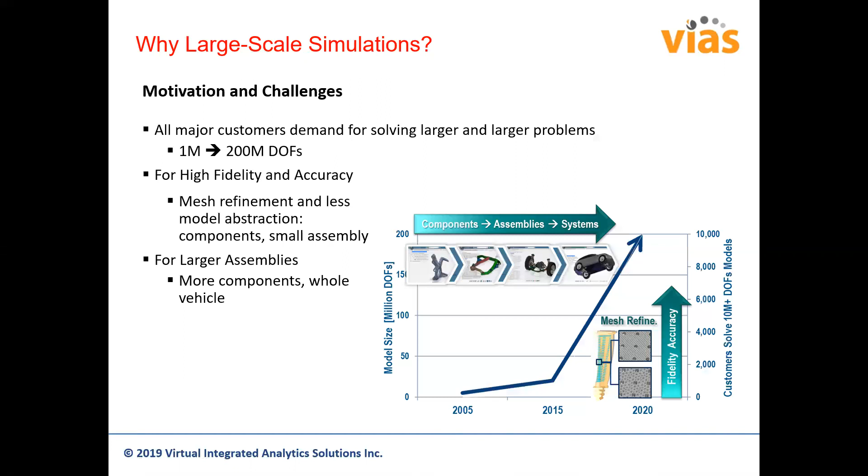When you have a lot of components, you have a lot of degrees of freedom that need to be solved for. So in either case, a good solver with very high performance would be very helpful. The challenge is the number of flops for a direct sparse solver increases non-linearly with the number of degrees of freedom. You may start with a very small number for 1 million degrees of freedom, but with a large number of degrees of freedom, the scaling will be non-linear and it affects performance. The memory requirement is another issue, not just performance.

So an iterative solver would be helpful in that case. It uses relatively less memory than the direct solver. It's generally faster, with scalable performance. That means it's a linear thing—your performance and memory requirement also go linearly in the case of an iterative solver. It's relatively robust for well-conditioned problems too.

The way to define that is in the keyword usage: star step, solver equal to iterative. There are a bunch of Abaqus environment variables you can use, like memory 90% and MPI run, if you want to run it on multiple nodes.

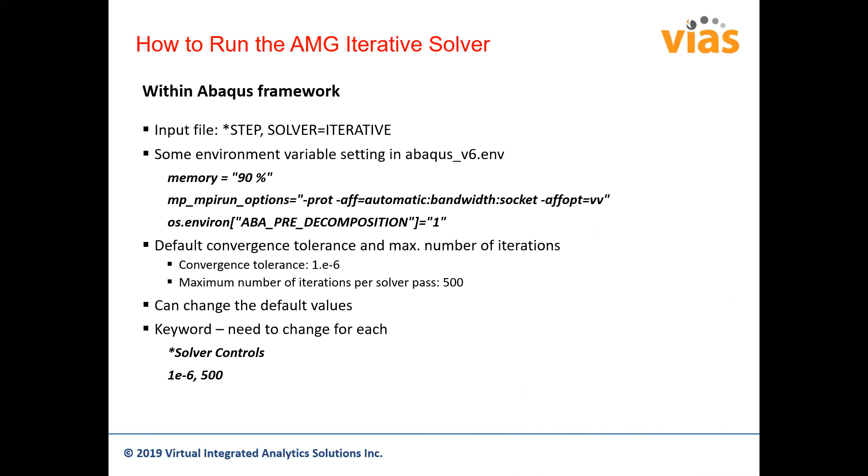Default convergence tolerance and maximum number of iterations can also be specified. The defaults are 1e-6 and 500 maximum number of iterations per solver pass. You can change the default values. The keyword to change for each is solver controls, with data lines for the convergence tolerance and maximum number of iterations.

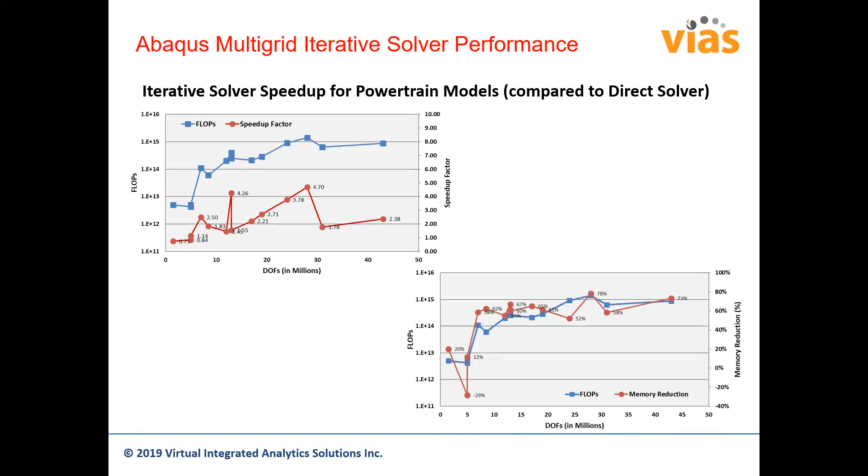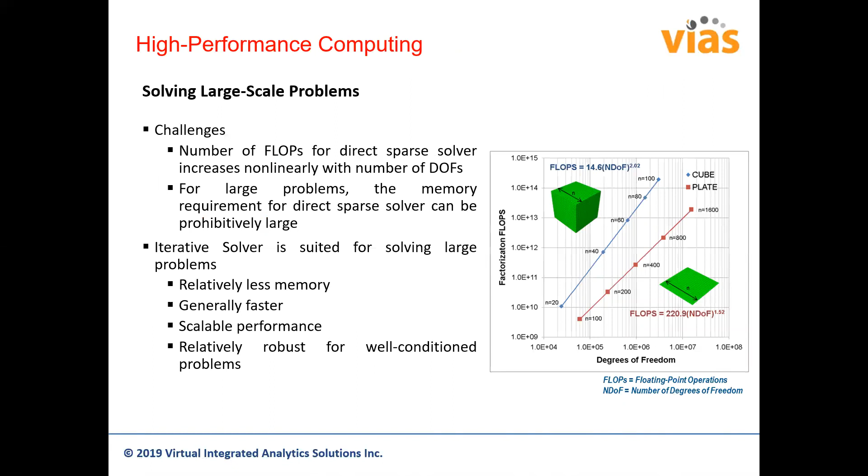This is just showing an example of how things have sped up, or became faster, with the iterative solver over the direct solver, and also the memory reduction too. I'll generally skip the details, but it just shows that the iterative solver is doing much better.

With that, I'll go on to the new topic here: linear dynamics updates. These are a bunch of updates introduced in 2019. Although it says 2018 on the slide, it's basically fix pack—whatever was introduced after the 2018 general release is mentioned there. So these are cumulative updates for 2019.

There are a bunch of improvements listed here. We'll talk about a few of them, and if you have more questions, you can always come back to us later for any particular updates you may be interested in.

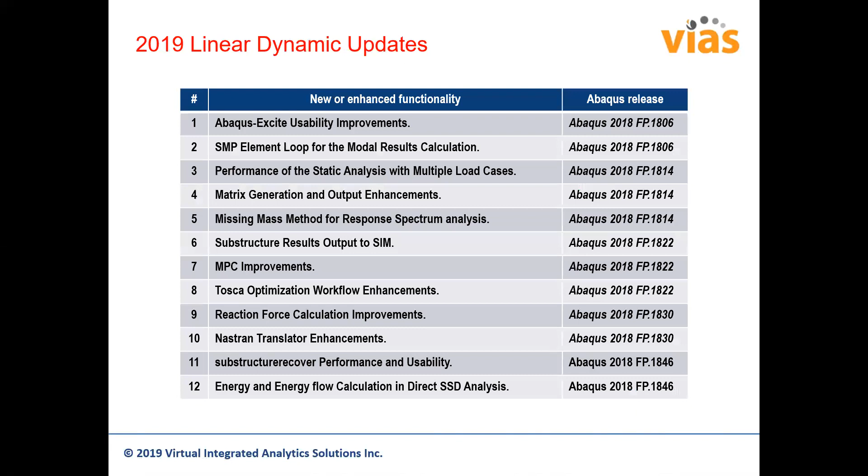Performance of static analysis with multiple load cases: the following improvements are implemented for linear perturbation static analysis with multiple load cases. If you have multiple load cases in a linear perturbation static analysis, one thing that used to be bad about it was the performance—it used to be much slower. That has been improved now.

Specifically, writing the solution into the internal Abaqus database has been made faster. There's also substantial computational performance gain achieved for analysis with multiple load cases with a relatively small number of concentrated loads. There's also improved symmetric memory parallel scaling for linear perturbation static analysis with inertia relief loading.

This is specifically for inertia relief procedures. It enables linear perturbation static analysis with inertia relief loading for simulation models defined using sparse matrices to represent the stiffness and mass of the model or a part of the model.

There's also improved robustness of the distributed memory parallel execution of linear perturbation static analysis with multiple load cases for extremely large finite element models, when running on multiple nodes. The overall takeaway is that the performance of linear perturbation static analysis with multiple load cases has been improved over the previous release.

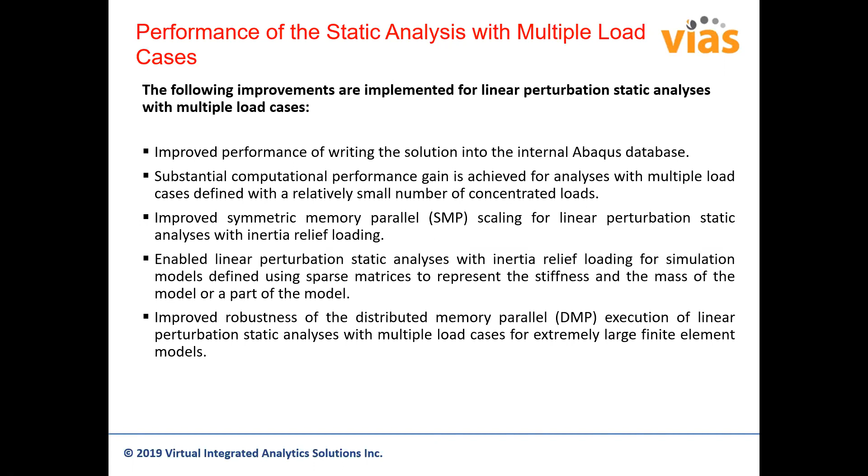There's also a new functionality introduced, called the missing mass method, specifically for response spectrum analysis. Using the missing mass method is recommended by the ASCE standard, a code for safety-related issues on nuclear structures. Use the missing mass method to augment the missing inertia in the dynamic response when the number of eigenmodes included in the superposition does not sufficiently quantify the total mass of the structure itself.

Usually you choose a particular set of eigenmodes, and ignore any other higher frequency modes. But any losses because of the contribution from those frequency modes can now be included, using a feature called the missing mass method.

The way to activate that would be keyword interface: star response spectrum, comma sum equal to CQC, rigid response equal to a particular method called Gupta, and you just have to add the parameter missing mass method.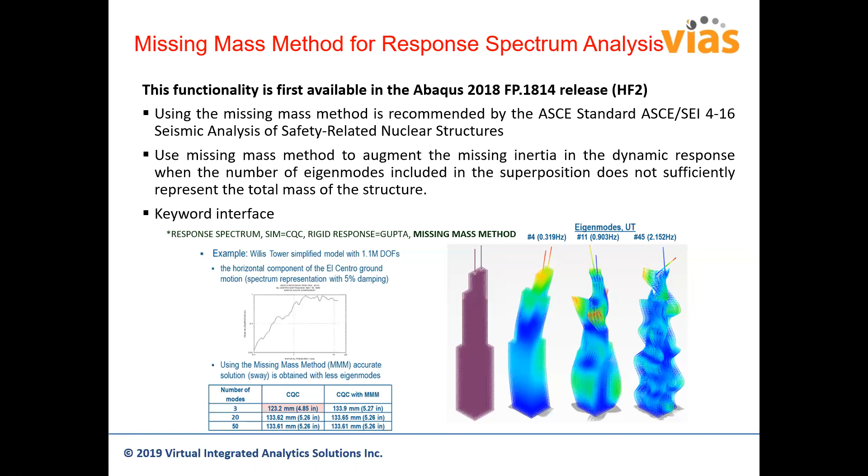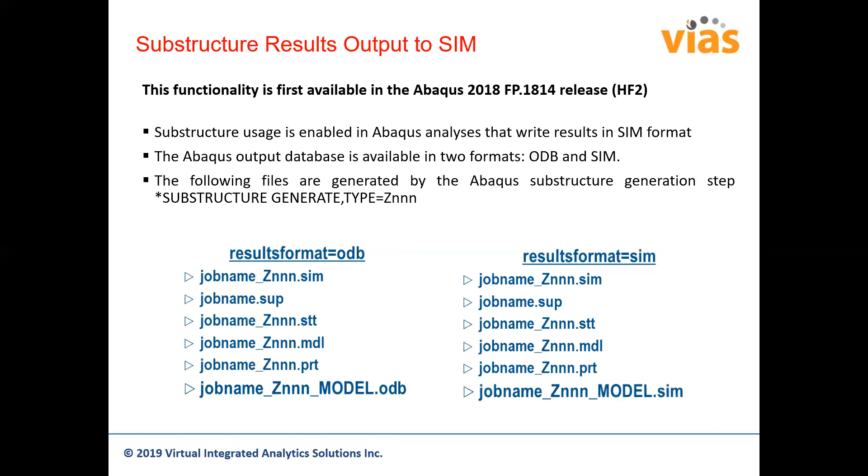Basically, you will activate it through results format equal to sim.

This functionality is first, so the next one is MPC improvement itself. It removes limitation due to number of load cases for large models in the MPC recovery code. If you had a very large number of load cases and degrees of freedom in the model, and also MPCs in the model, there was some kind of restriction there. It used to actually abort with the error message exceeding number of integers allowed.

So when running static or direct steady state dynamic analysis with multiple load cases for large models, that restriction has been removed. Performance has been improved, and also memory usage for the static perturbation analysis and for direct steady state dynamic analysis, both single core, single node, and multiple compute node analysis. It is now possible to solve problems that couldn't be solved before.

For example, they are talking about a body in white car model which had a very large number of degrees of freedom, 36 million, 132 load cases, and many thousands of tie definitions. That couldn't be solved before in previous releases, but now it can be solved.

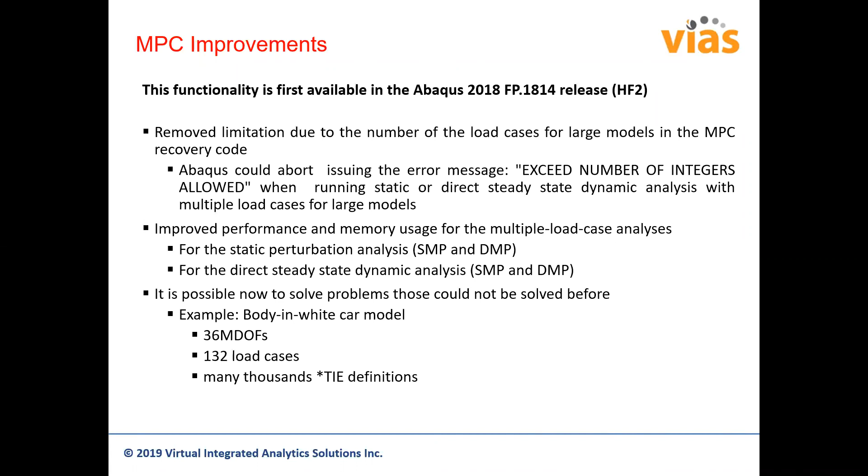There's also improved NFORC output. There's nodal forces output variable formulation available in direct steady state dynamic analysis. Without going into full details, what I'd like to state is in earlier releases, NFORC output would compute for a direct steady state analysis only the displacement contribution, but now both the inertia and damping effects are included in the NFORC output.

The details say they're including both the hourglass and the regular deformation modes of the element. The underlying formulation used to be only the displacement contribution, but now we have both the inertia and damping terms also for steady state dynamic analysis.

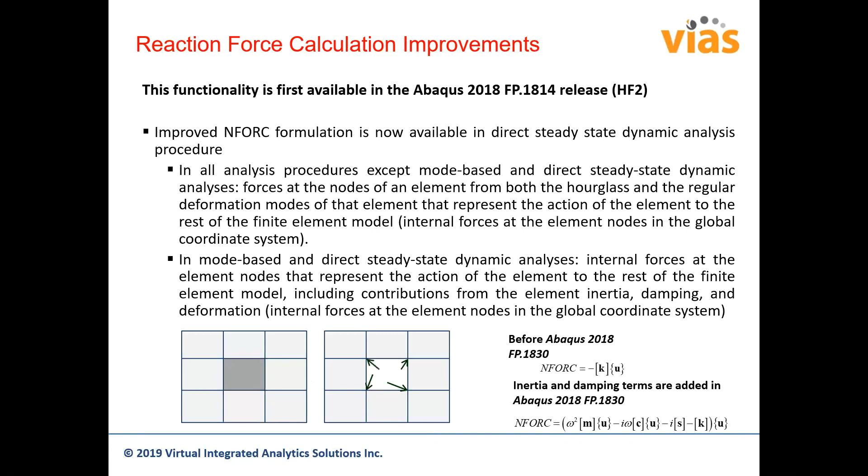The following enhancements are available for shell thickness defined as part of the element connectivity, which can be translated from Nastran. These are about translation from Nastran. Distribution is now used, so earlier when shell thickness varied across different elements, it used to be a problem, but now star distribution is automatically created in Abaqus when translating from Nastran.

Significant speed up is achieved for the translation of very large models that have distributed couplings and/or concentrated mass elements. So if you have a lot of those features in the model from Nastran, now the translation is much faster. For example, a 36 million degree of freedom body in white model, mentioned earlier, with 200K CONM2 point mass elements from Nastran and 100K RBE3 elements, which is basically the distributing coupling equivalent in Nastran.

Now the translation time has been reduced from 2.5 hours to 10 minutes. So that's a very significant improvement in performance.

There's also substructure recovery performance and usability improvements. You can recover the results in a substructure once you have used it in a model. First is an improved performance itself for writing results to the output database, and also principal stress and strain calculation.

We also added command line arguments to customize the output, like min frame value, max frame value, and so on. Added command line arguments to select a particular time or frequency interval for recovery. And we also added calculation of the absolute max principal stress.

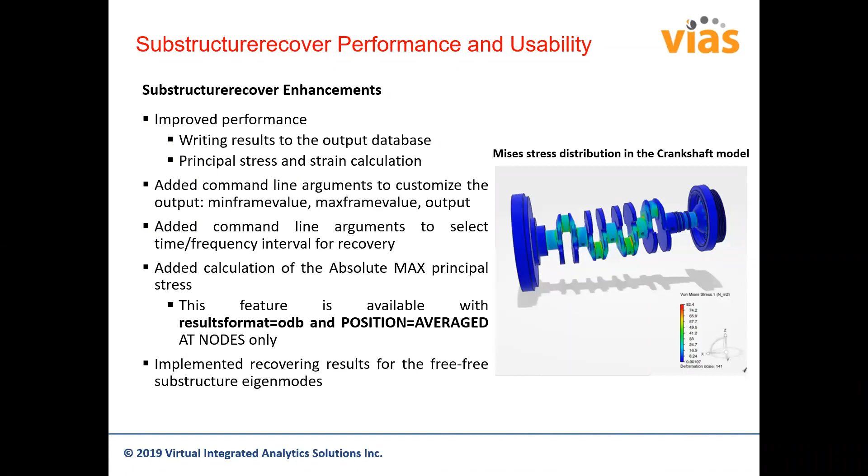Energy and energy flow calculation, direct SSD, direct steady state dynamics procedure enhancements, energy output for multiple load cases. There are many new energy output variables, and also energy and power flow calculation. Current limitations were porous elastic elements, acoustic elements with perfectly matched layers, and infinite solid elements.

Energy variables for quiet boundaries are computed only for the first load case only. Radiated acoustic energy or power is not supported in DMP mode.

I think this is the last topic, and with this we'll switch to the Q&A. So basically, the significant multi-year effort to compute adjoint design sensitivities inside of Abaqus standard.

This can drive combined Abaqus Tosca design optimization workflows, both CAE and 3DX based, including output of sensitivities from a standalone Abaqus standard analysis, which I briefly mentioned earlier. It's also included in Abaqus documentation. Currently we support topology, sizing, lattice, shape, and bead sensitivities, which is basically the full scale. The bead sensitivity is currently only available in LA, but will be available as a GA from 2019 onwards.

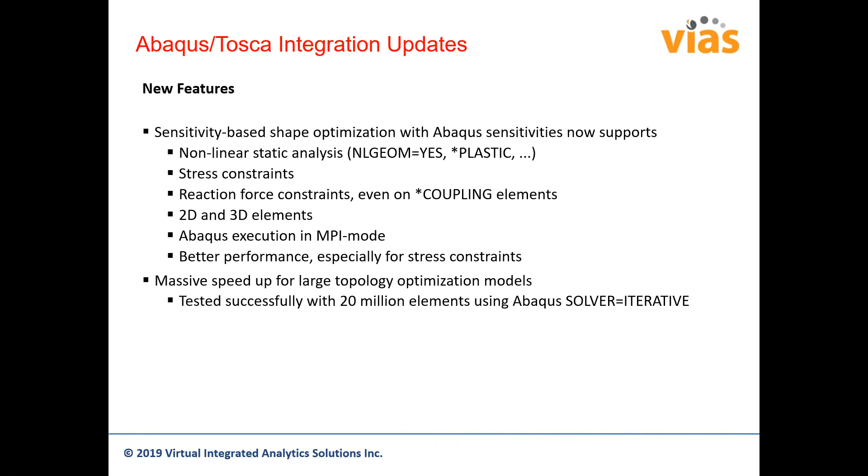There are a bunch of more new features, but for lack of time I will just skip them. You will have this available for whenever you want to check this in, and if you have any questions you can always come back to us. We will always help you out with the details of each of these topics too. So with that, I think I will just skip the rest of the slides, and thank you for your time.